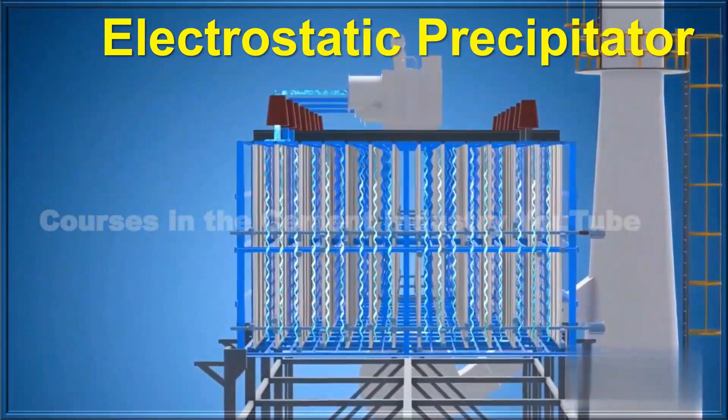An electrostatic precipitator, ESP, is a particle control device that uses electrical forces to move the particles out of the flowing gas stream and onto collector plates. The particles are given an electrical charge by forcing them to pass through a corona, a region in which gaseous ions flow. The electrical field that forces the charged particles to the walls comes from electrodes maintained at high voltage in the center of the flow lane.

Once the particles are collected on the plates, they must be removed without re-entraining them into the gas stream. This is usually accomplished by knocking them loose from the plates, allowing the collected layer of particles to slide down into a hopper from which they are evacuated.

Principle of electrostatic precipitators. The principle of dust collection with electric precipitators, also called electric gas cleaning, or electrostatic precipitation, is based on the utilization of the effect of gas ionization in a strong electric field, which is formed by discharge electrodes, corona effect, negative, and by collecting electrodes, positive.

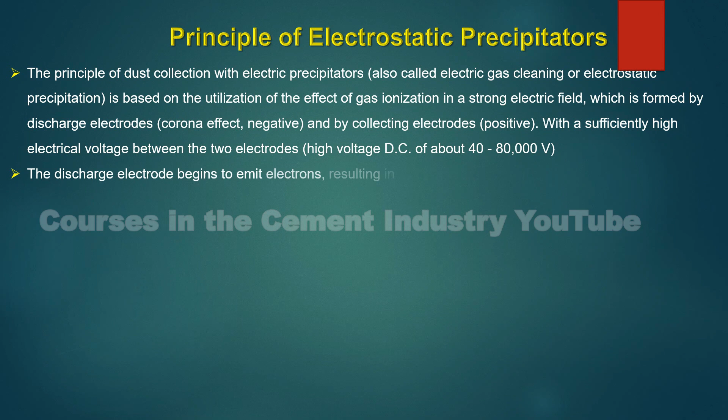With a sufficiently high electrical voltage between the two electrodes, high voltage DC, of about 40,000 to 80,000 volts, the discharge electrode begins to emit electrons, resulting in charging the gas molecules surrounding the electrode into positive and negative ions. Under the influence of the strong electric field, the negative ions now migrate to the grounded positive, or collecting electrode.

If the gas is dust-laden, the negative ions impose their charge onto the dust particles, which then are attracted by the positive electrode, being precipitated and neutralized. By rapping or vibration, the collected dust is removed from the collecting electrode, dropping into a dust bin.

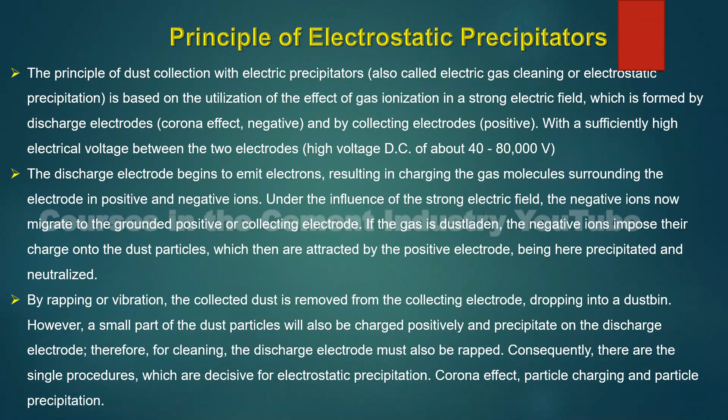However, a small part of the dust particles will also be charged positively, and precipitate on the discharge electrode. Therefore, for cleaning, the discharge electrode must also be rapped. Consequently, there are the single procedures which are decisive for electrostatic precipitation: corona effect, particle charging, and particle precipitation.

Principle of electrostatic precipitators.

Depending on the conception of the gas, its temperature, and the nature of the dust, it happens that the attractive force of the collecting electrode slows down, resulting in a lower efficiency of the electric precipitator.

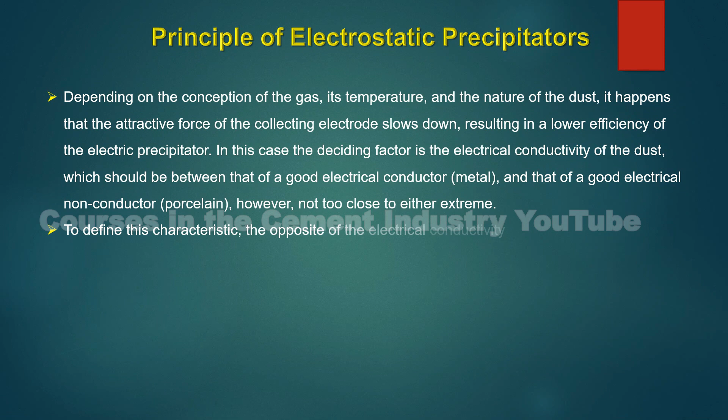In this case, the deciding factor is the electrical conductivity of the dust, which should be between that of a good electrical conductor, metal, and that of a good electrical non-conductor, porcelain. However, not too close to either extreme. To define this characteristic, the opposite of the electrical conductivity, the electrical resistance, is applied.

For the most favorable precipitation conditions of an electrostatic dust collector, the electrical resistance of the dust particles should be between 10 to the 4th and 10 to the 11th ohm-centimeters. The electrical resistance of most kinds of dust appearing in a cement plant is within these limits.

Dust with a low electrical resistance loses its electrical charge immediately on the collecting electrode, and after reversing polarity, returns into the gas current.

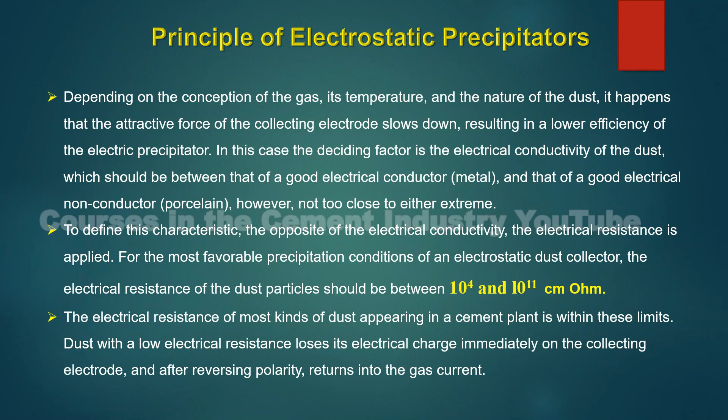Principle of electrostatic precipitators.

The electrical resistance of the dust increases with increasing temperature, with an electrical dust resistance in the magnitude of 10 to the 14th ohm-centimeters. The dust adheres to the collecting electrode, forming an insulating layer, thus considerably deteriorating the rate of precipitation. In this case, spark points appear on the collecting electrode, generating reversed ionization.

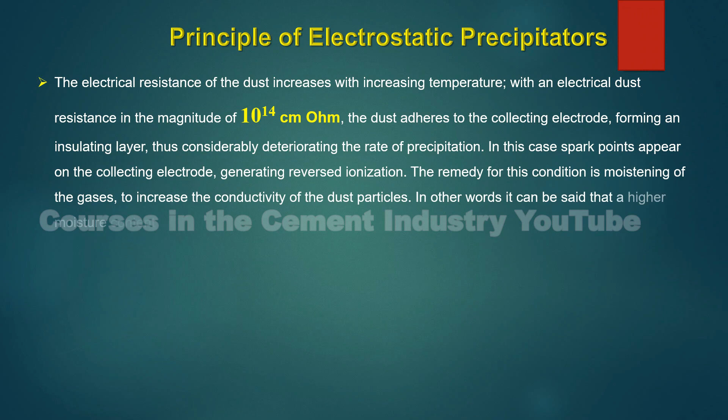The remedy for this condition is moistening of the gases, to increase the conductivity of the dust particles. In other words, a higher moisture content of the carrier gas lowers the electrical resistance of the dust. Therefore, manufacturers of electrical precipitators recommend a moisture content for rotary kiln exit gases of

15 to 18% by volume. This necessitates the application of spray towers, or evaporative coolers, which increases the investment and operating costs.

Electric precipitators for clinker cooler vent air, on the other hand, show the highest efficiency with vent air moisture of only 2.5 to 3.5% by volume. With a gas temperature close to the dew point, the influence of the moisture is more effective. This results in a better degree of precipitation.

The high voltage current is passed through the cathodes. The leakage of current from the cathodes is called corona. These electrons charge the dust particles negatively. The negatively charged particles stick to the anode. This process is called collection.

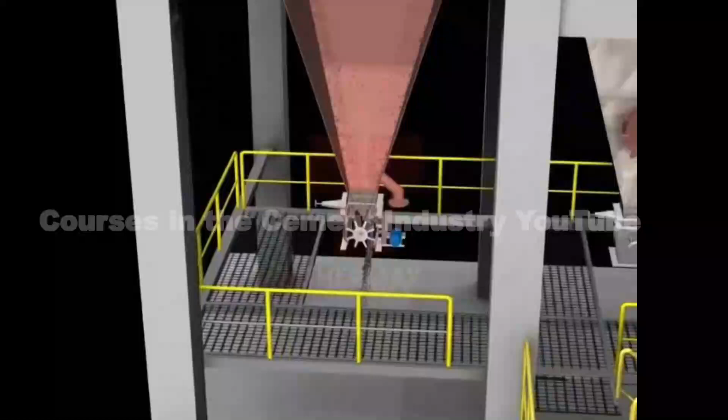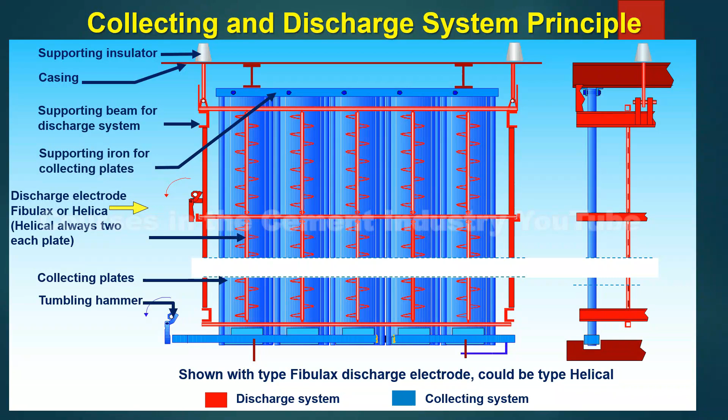The collecting and discharge system consists of: 1. Supporting insulator. 2. Casing. 3. Supporting beam for discharge system. 4. Supporting iron for collecting plates. 5. Discharge electrode, Fibulax or helical, attached to each plate. 6. Collecting plates. 7. Tumbling hammer. 8. Rapping bar.

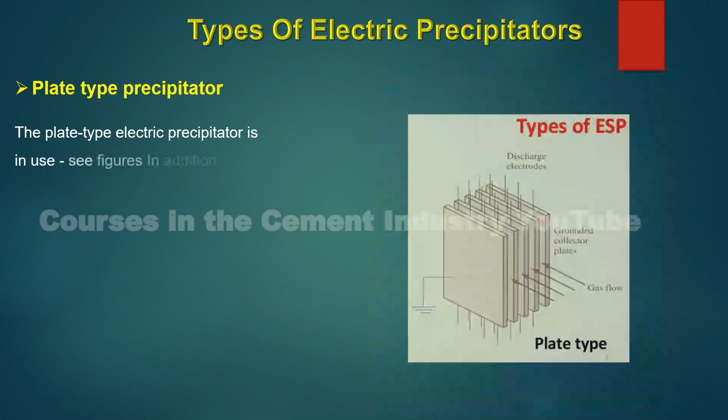2. Plate-type precipitator. The plate-type electric precipitator is in use, see figures. In addition to precipitation by action of the electrical field, there is in the electrical dust collector also precipitation of a certain quantity of dust particles by action of gravity, as well as precipitation by change of direction and by impact.

Types of electric precipitators. When eliminating the energy supply, or during blackouts, the electrical precipitator works as a dust settling chamber, with collection efficiencies of about 30 to 70%. Therefore, collection efficiencies of about 95% are attainable, even under unstable electric conditions.

Because of the high mechanical collection efficiency of 85 to 90%, a combination of an electric precipitator with a primary dust collector will be unnecessary in many cases. However, with higher dust concentration, the use of a primary collector can considerably improve collection efficiency.

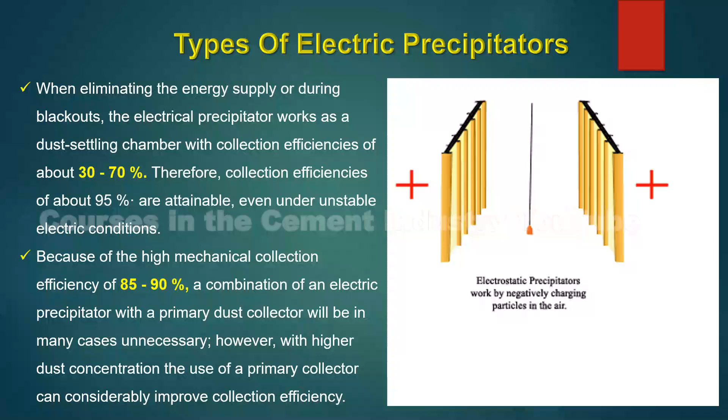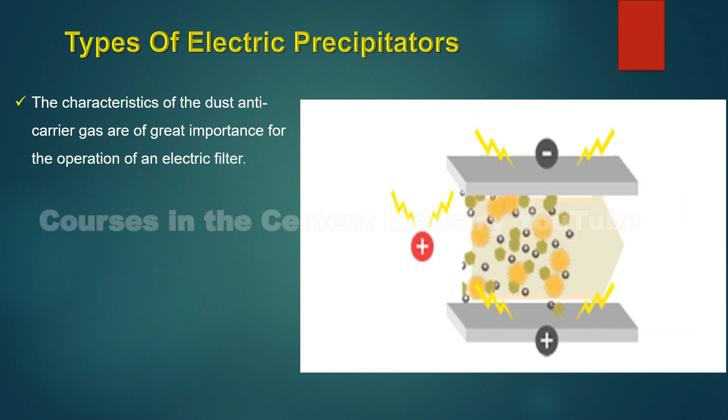The characteristics of the dust and carrier gas are of great importance for the operation of an electric filter. The velocity with which the dust is attracted by the collecting electrodes, the traveling velocity, is important for the collection efficiency, and depends on the corona voltage, the intensity of the electric field, the dust particle size, and the viscosity of the gas.

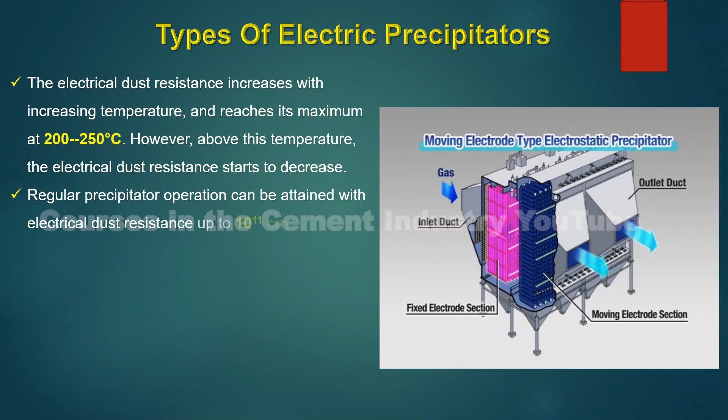Types of electric precipitators. The electrical dust resistance increases with increasing temperature, and reaches its maximum at 200 to 250 degrees C. However, above this temperature, the electrical dust resistance starts to decrease. Regular precipitator operation can be attained with electrical dust resistance up to 10 to the 11th ohm-cm.

With an electrical dust resistance higher than that, for example about 10 to the 14th ohm-cm, the dust acts as an insulating layer, which impairs the collection efficiency. In some cases, a temperature change of about 10 to 20 degrees C has a decisive influence on the collection efficiency.

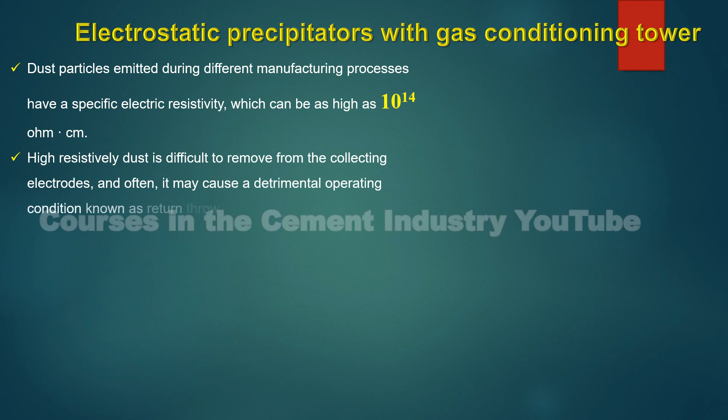Electrostatic precipitators with gas conditioning tower: 1. Dust particles emitted during different manufacturing processes have a specific electric resistivity, which can be as high as 10 to the 14th ohm-centimeter. 2. High resistivity dust is difficult to remove from the collecting electrodes, and often it may cause a detrimental operating condition, known as return throw of sparks or back ionization.

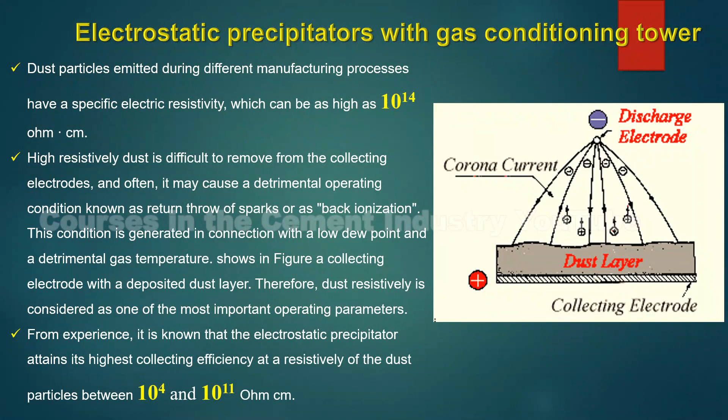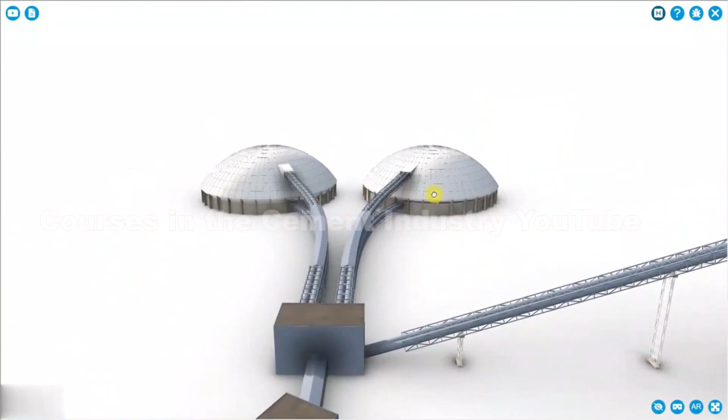See this video: a nice example of a coal-fired power station, a thermal type power station. Our coal would actually be stored in these two areas here. We've got a roof on this area, so it's under cover, which means our coal stays dry. We're going to draw it out through conveyors, then come along here away from the storage area, up our inclined conveyor, and into the boiler house or the power station.

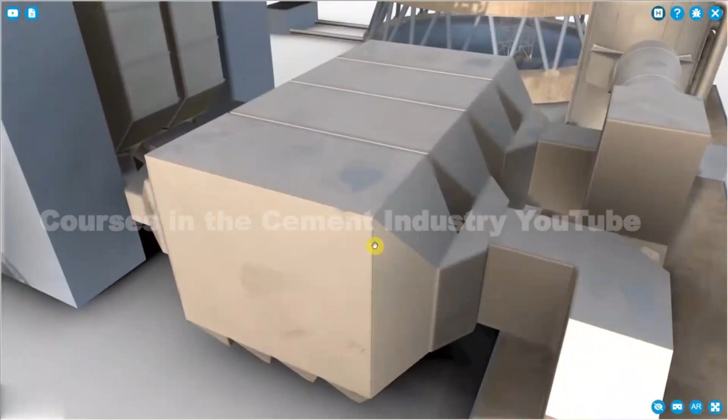It's going to go into our boiler, that's our water tube boiler. It's going to come out - you can see here's one of our ducts that we saw earlier. It's going to pass into this item, which looks a bit like a Lego block or four blocks put together. These items are our electrostatic precipitators.

After that, the exhaust gas comes out, comes along here, goes to our flue gas desulfurizer, or FGD. We've also got a video about that if you want to check it out. Then finally, it will go to our cooling tower, which we've also got a video about, and the exhaust gases will be blown out of the top. You can see here the pipe connection, where we discharge the exhaust gases out of the top of the cooling tower and into the atmosphere.

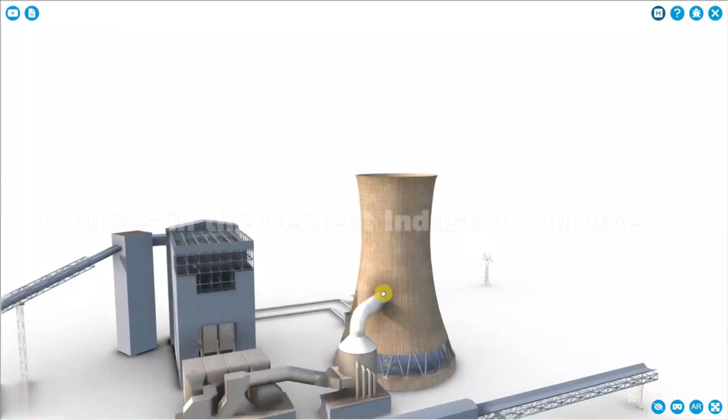By the time the exhaust gases are discharged from the cooling tower or via a stack, they're actually quite clean. They have to be, because as I mentioned before, people don't want to be made sick if they're living near a power station, and we don't want to damage the environment either. So how did we clean up our exhaust gas?

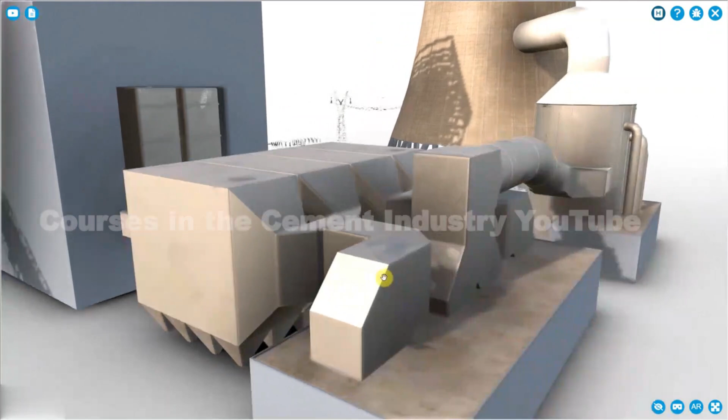We removed the particulates contained within the exhaust gas using our ESP, so the fly ash was removed by the ESP. Usually the ESP is about 98 to 99.9% efficient, so it's going to remove a lot of fly ash. We put the ESP before our induced draft fan, because those particulates don't need to pass through the fan, which may cause damage to it, prior to being discharged.

So how are we removing 98 to 99.9% of all fly ash from the exhaust gas stream? Well, let's go and have a look now at how electrostatic precipitators work.

Electrostatic precipitators, with gas conditioning tower.

Resistivity can be reduced by several factors, by a power of 10, through water injection into the evaporative cooling tower, which considerably improves the conductivity within the electric precipitator.

The size of such a conditioning tower is determined by the gas volume and by the gas temperature at entry and exit. Here, the most important parameter is the specific number of evaporation.

For example, it lies between 16 to 22 for gas cooling from 350 down to 150 degrees C, and between 24 to 28 for cooling from 450 down to 150 degrees C.

M3 refers to the effective space for evaporation within the cooling tower.

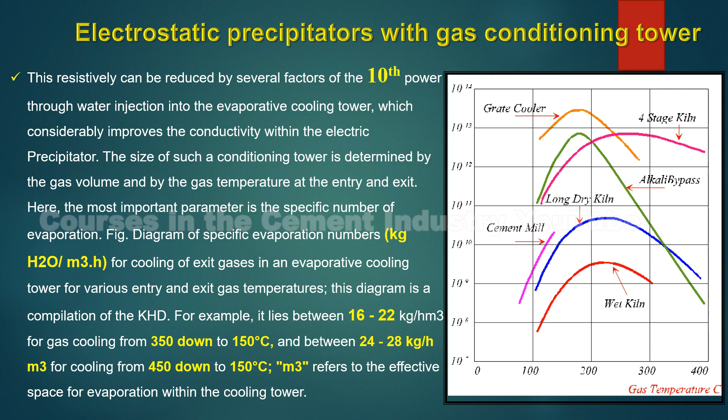The arrangement of the conditioning tower in a cement plant using the precalcining process is determined by the type of raw grinding system. If a roller mill is installed, the cooling tower should be located, for practical reasons, in front of the kiln ID fan, because at low moisture of the raw material, the total heat content of the exhaust gases is not needed, but the total gas volume for material transportation is necessary.

If the roller mill is not in operation, when operating without utilization of the exit gas, the total gas conditioning takes place in the evaporative cooler.

If for drying grinding purposes a ball mill is installed, then the conditioning tower is placed parallel to the grinding system. This partial gas operation allows the conditioning of small gas volumes, since in this case the total gas volume is not needed for drying purposes.

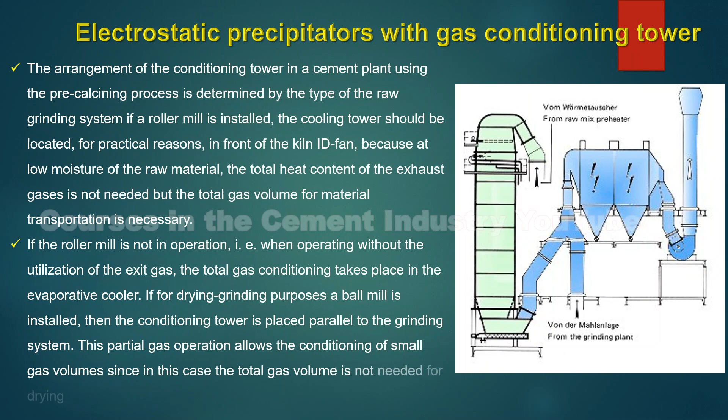Electrostatic precipitators, with gas conditioning tower.

The water injector nozzles of the conditioning tower have a turn-down ratio of 1 to 10, and the volume control is stepless, using a motor-operated control valve in the return line.

The dust precipitated inside the spray tower is extracted by a paddle screw conveyor. Depending on the negative pressure conditions, a double flap gate or a self-cleaning rotary valve is installed as an airlock.

When using a gas conditioning tower, the efficiency of the electrostatic precipitator is increased, due to higher voltage and ampere levels.

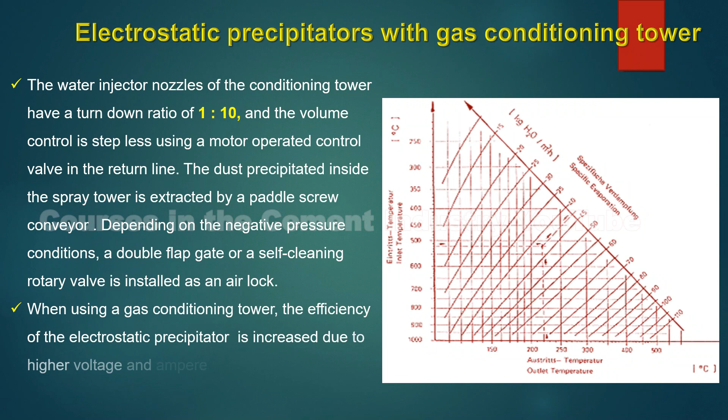Remarks on gas cleaning. The resistivity and cohesivity of the dust are important factors for preventing collected dust from falling back into the gas stream.

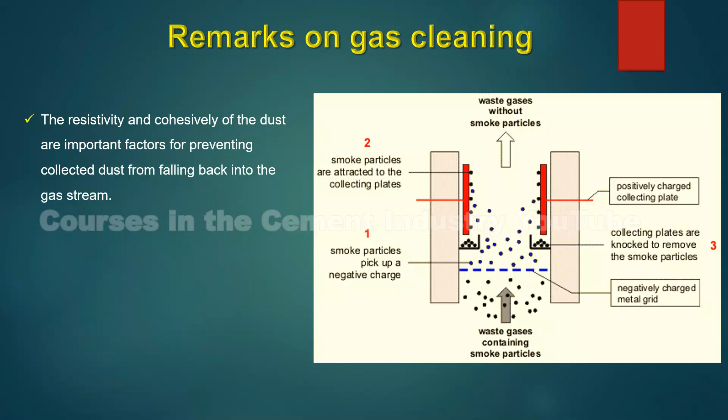Coherency plays a vital part in keeping the dust together when it is removed from the precipitator. If the particles of dust do not cohere, they separate and mix with the gas once more, spoiling the action of the precipitator.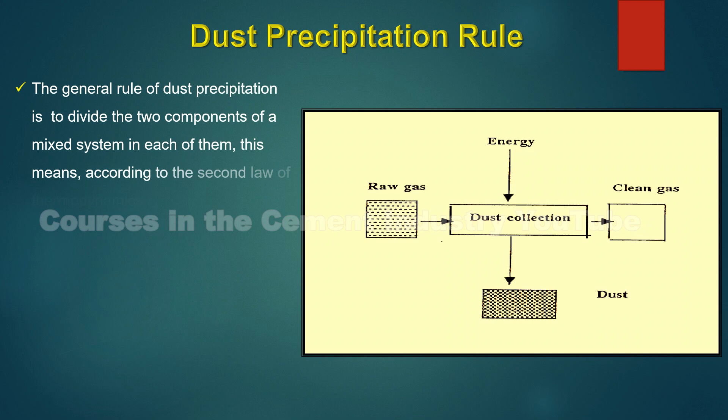Dust precipitation rule: the general rule of dust precipitation is to divide the two components of a mixed system into each of them. This means, according to the second law of thermodynamics, bringing this system from a low to a high degree of order.

In nature this is only possible by an input of energy. No dedusting equipment can work without the consumption of energy.

The relationship between electrostatic precipitators' efficiency, sizes, and power input.

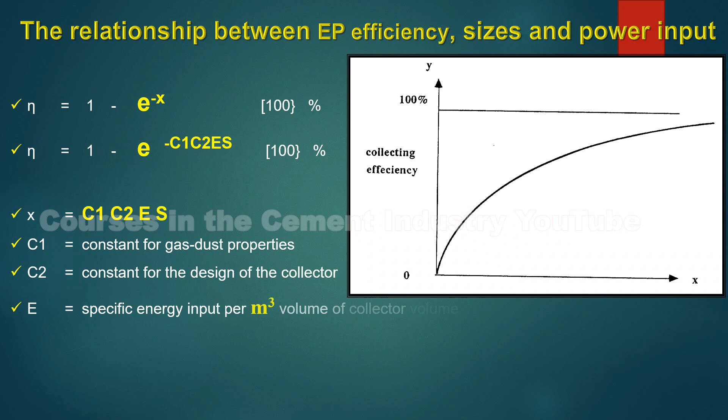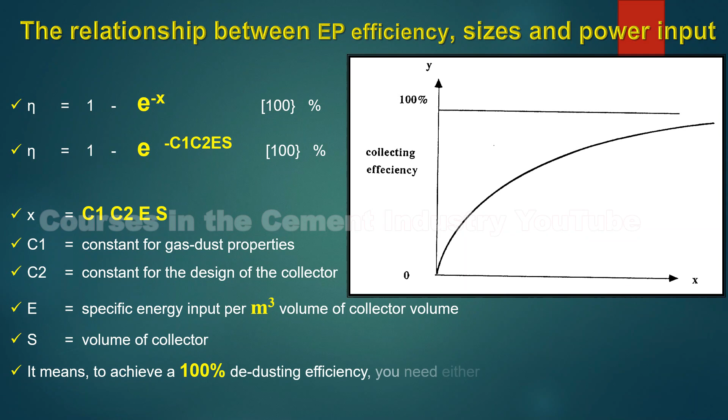Efficiency of electrostatic precipitators: the Deutsch formula.

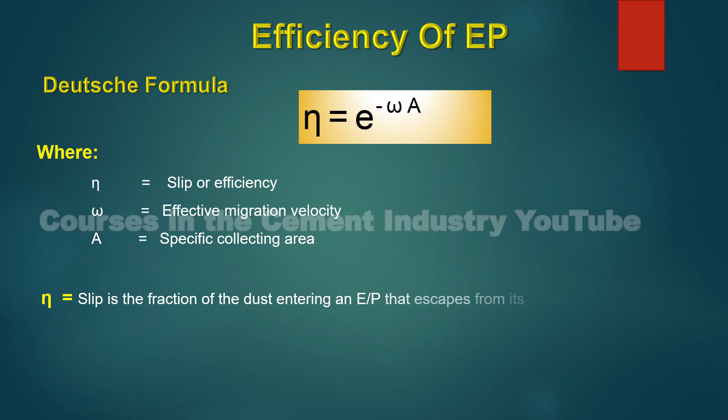Deutsch formula. Effective migration velocity, EMV, is related to the rate at which a particle makes its way toward the collecting electrode under the combined influence of the electrical and aerodynamic force on it.

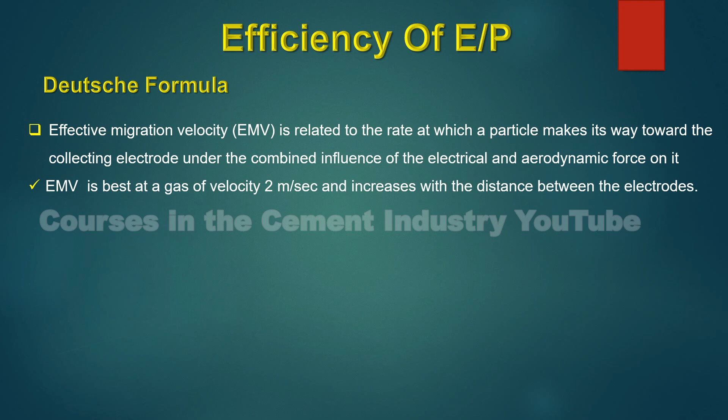EMV is best at a gas velocity of 2 meters per second, and increases with the distance between the electrodes. Discharge called flashovers.

Re-entrainment plus scouring depend on gas velocity, which must be kept as low and uniform as possible. Puffing, due to rapping and re-entrainment.

Electrodes are rapped before the layer of dust is thick enough to let the dust fall as a mass into the hopper.

Stokes' law: electrostatic force on the particle equals viscous drag.

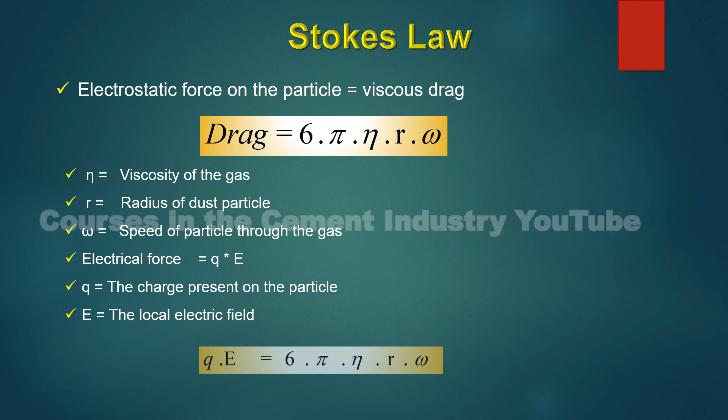Cross-section in electrostatic precipitators filter.

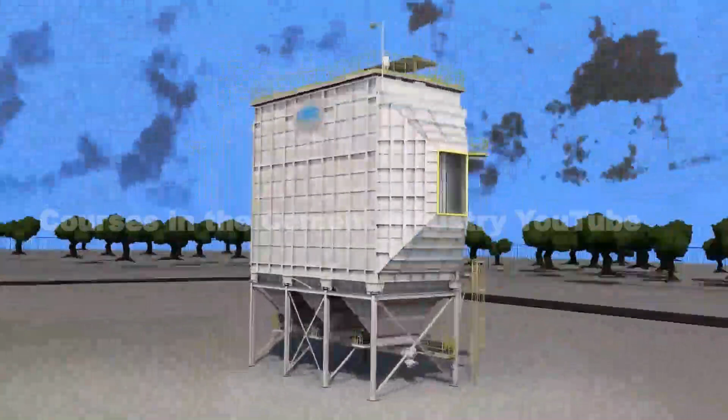A dry electrostatic precipitator, ESP, electrically charges the ash particles, and imparts a strong electric field in the flue gas to collect and remove them.

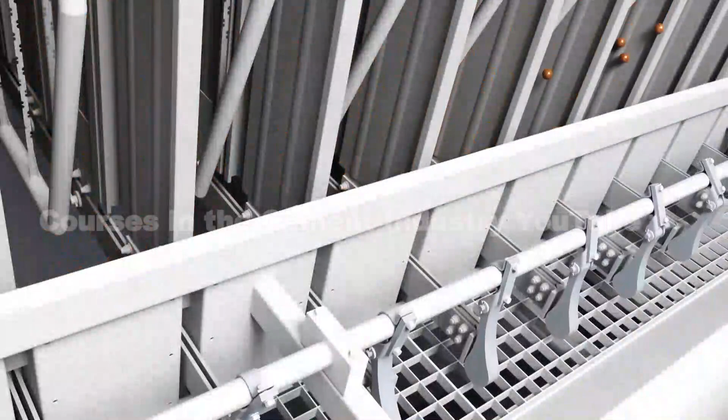An ESP is comprised of a series of parallel, vertical metallic plates, the collecting electrodes, forming lanes through which the flue gas passes. Centered between the collecting electrodes are discharge electrodes, which provide the particle charging and electric field.

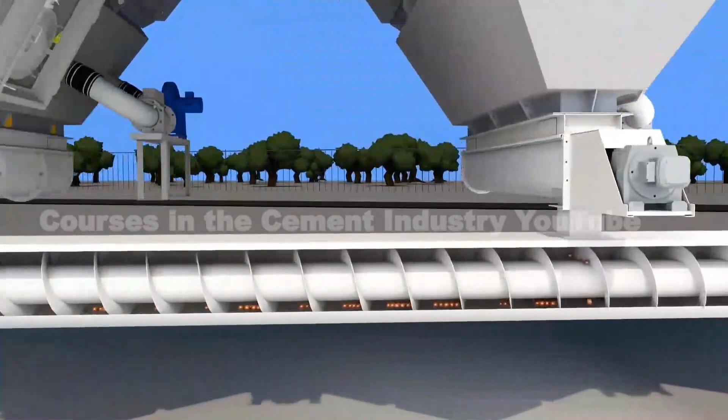The figure shows an uncharged particle collecting charge over a wide angle, a partially charged particle collecting charge over a smaller area, and a fully charged particle that repels further charge.

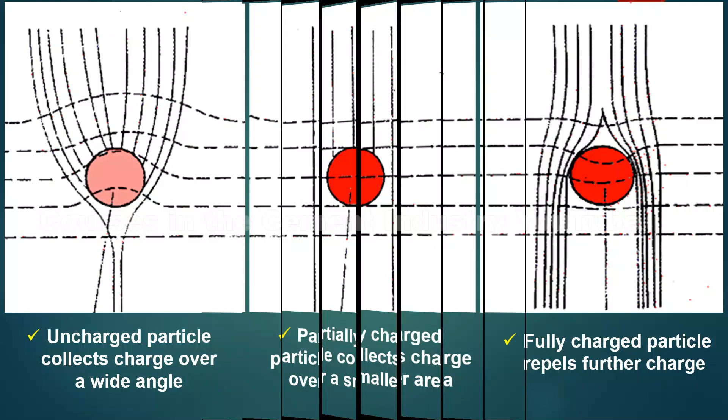The forces that occur in the electrostatic precipitator filter. The figure shows the forces acting on a charged dust particle inside an electrostatic precipitator: aerodynamic force, force of gravity, electrostatic force, and the result of electrostatic force and gravitational attraction.

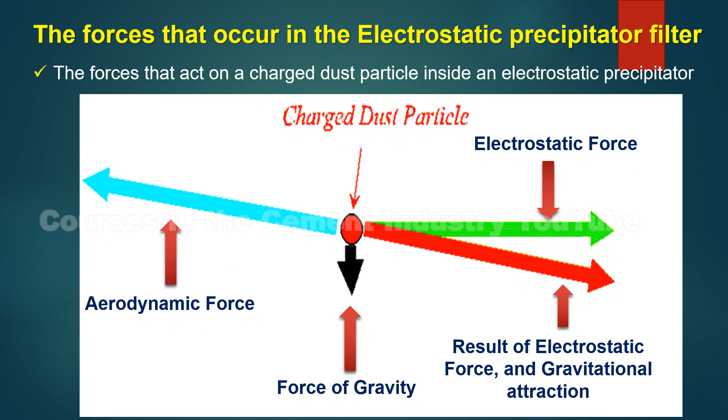The figure shows types of discharge electrodes: a rod with special spikes, a wire with star cross section, a flat electrode with spikes, and wire thickness of 2 or 3 millimeters.

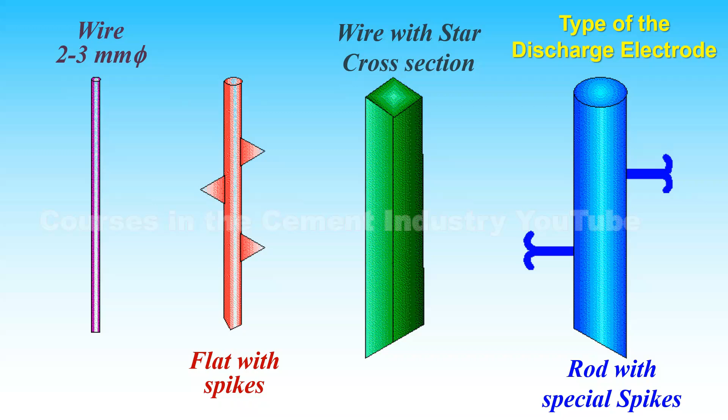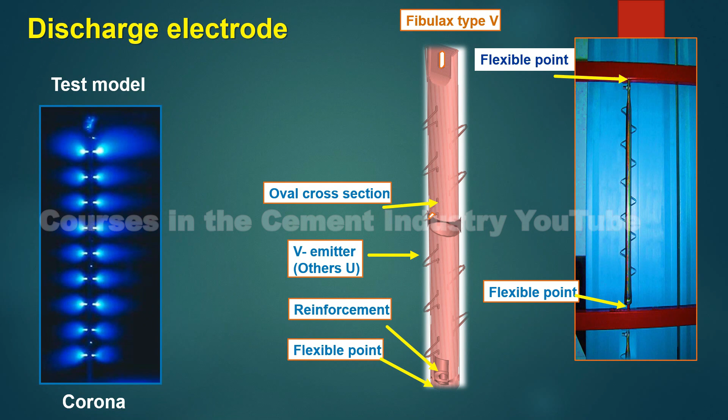Discharge electrode, Fibulax type V, consists of: a flexible point, an oval cross section, a V emitter (others U), reinforcement, a collecting plate, and a fix point. This point, depending on the ESP height, has 1 or 2 layers.

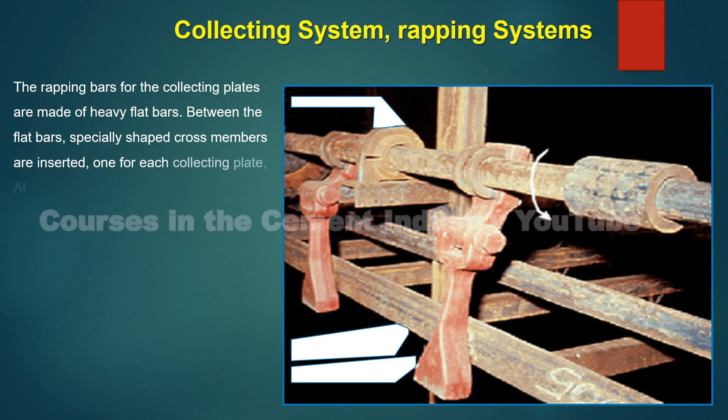Collecting system, rapping systems. The rapping bars for the collecting plates are made of heavy flat bars. Between the flat bars, specially shaped cross members are inserted, one for each collecting plate. At the impact end of the rapping bars, a specially shaped hardened impact anvil is fixed.

The rapping bars are supported by a bearing bridge and a rapping bar guide respectively, and there are no fixed connections between the collecting plates and the rapping bars. The level of the rapping bars can be adjusted in the supports.

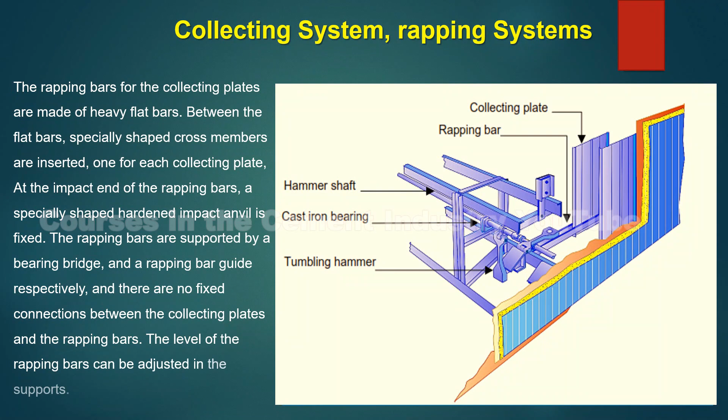The collecting plates protrude through the rapping bars, and because of the eccentric suspension of the collecting plates, each plate presses against the specially shaped cross members of the rapping bars, resulting in efficient contact for transmission of impact energy. Individual heat expansion of the collecting plates is allowed by the clearance between rapping bars and collecting plates, without vertical movement of the rapping bars.

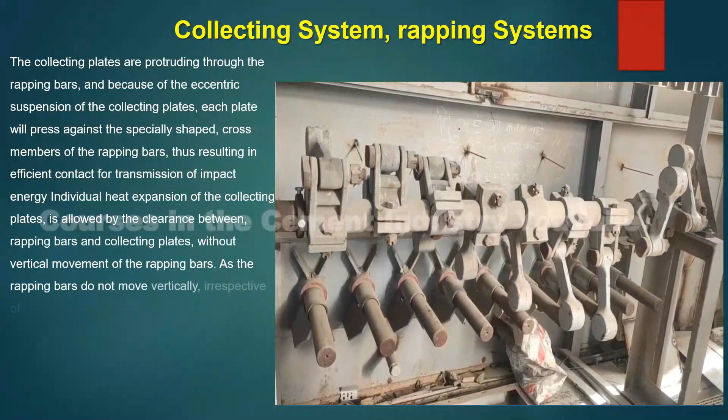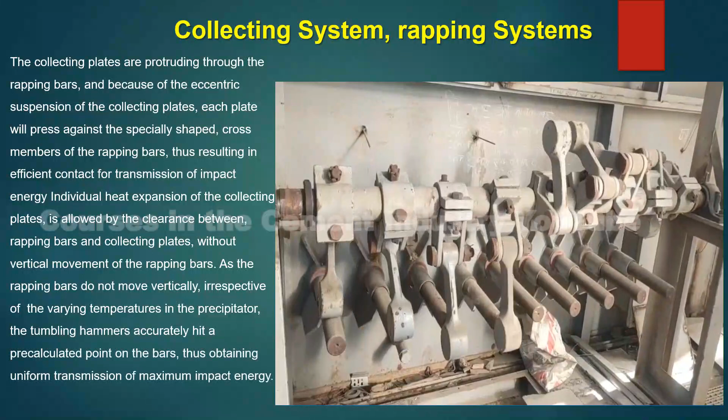As the rapping bars do not move vertically, irrespective of varying temperatures in the precipitator, the tumbling hammers accurately hit a precalculated point on the bars, obtaining uniform transmission of maximum impact energy.

The tumbling hammers, whose weights depend on the height of the collecting plates or the process, are made of drop-forged hardened steel to prevent forging at the impact point. Because of the fixed position of the rapping bars, and the tumbling hammers hitting a precalculated point, no reactions occur in the center of rotation of the hammers, reducing wear to a minimum.

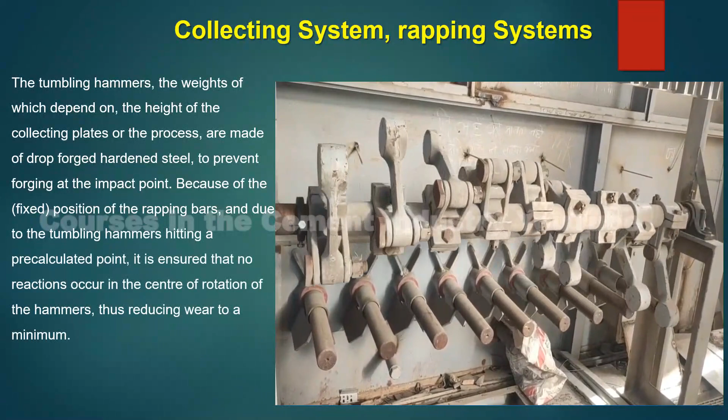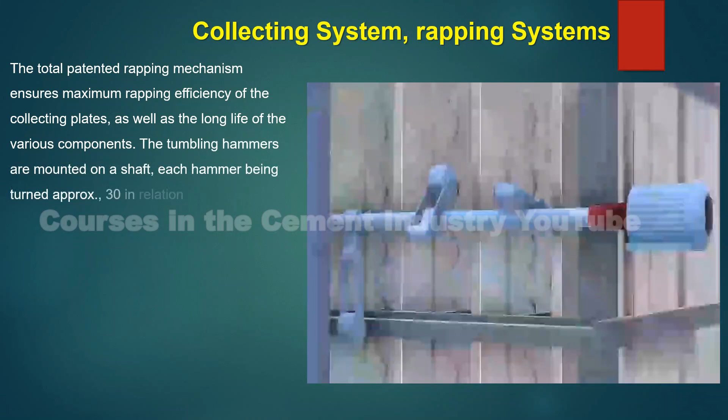Collecting system, rapping systems. The total patented rapping mechanism ensures maximum rapping efficiency of the collecting plates, as well as long life of the various components. The tumbling hammers are mounted on a shaft, each hammer turned approximately 30 degrees in relation to the preceding hammer, ensuring only a few hammers hit at the same time.

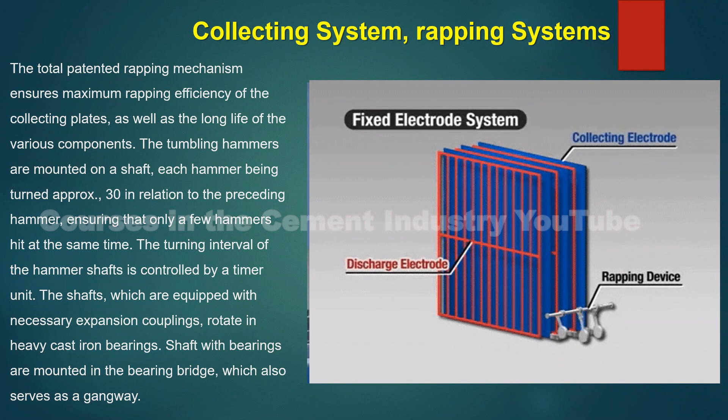The turning interval of the hammer shafts is controlled by a timer unit. The shafts, equipped with necessary expansion couplings, rotate in heavy cast iron bearings. Shafts with bearings are mounted in the bearing bridge, which also serves as a gangway. The bearing bridge, made of heavy L-sectional steel, forms a very rigid unit, suspended from the side walls of the precipitator in laminated springs.

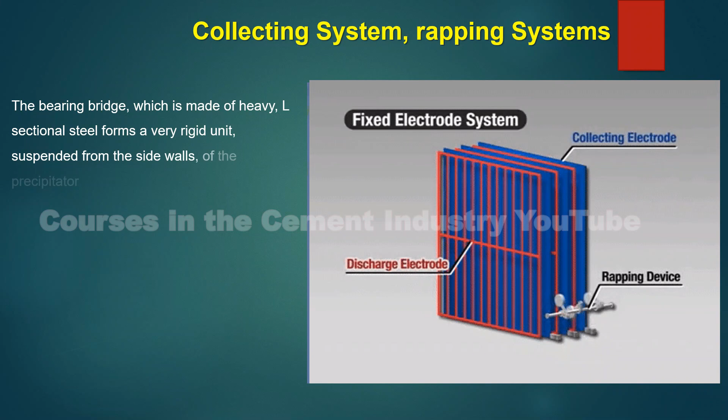This design prevents damage to the rapping mechanism in case of deformation of the precipitator casing, such as buckling due to heat or explosions.

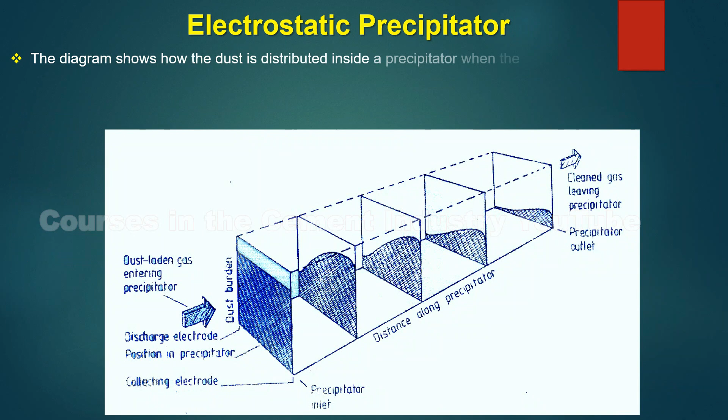Electrostatic precipitator: the diagram shows how dust is distributed inside a precipitator when the gas flow has finite turbulence. The effect of the turbulence is to carry dust in the direction of the concentration gradient. The result is that, no matter how long the precipitator is, the gas in the middle of the duct is never quite clean.

The diagram shows dust distribution inside the electrostatic precipitator when gas flow is laminar.

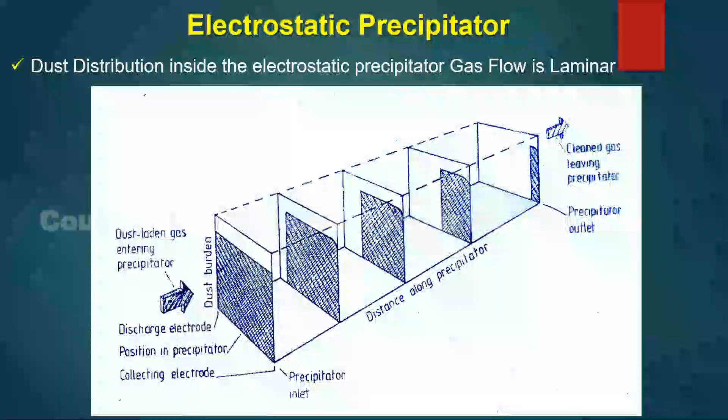The diagram shows how dust is distributed inside an electrostatic precipitator when the gas flow has infinite turbulence. At any point along the length of the precipitator, the dust burden is the same all across the duct.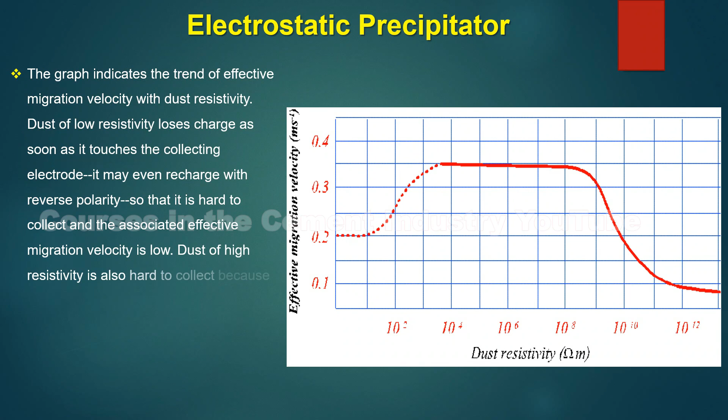The graph indicates the trend of effective migration velocity with dust resistivity. Dust of low resistivity loses charge as soon as it touches the collecting electrode; it may even recharge with reverse polarity, making it hard to collect, so the associated effective migration velocity is low. Dust of high resistivity is also hard to collect, because back ionization occurs and disrupts the operation of the precipitator. The values of effective migration velocity given in the graph are indicative only.